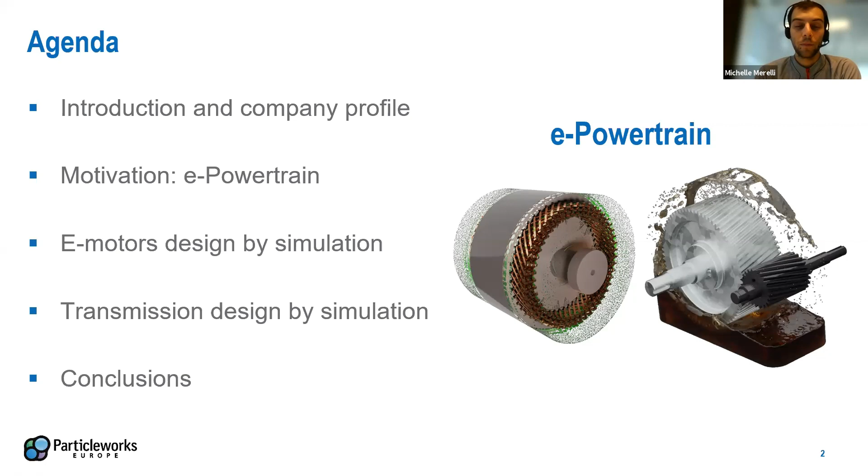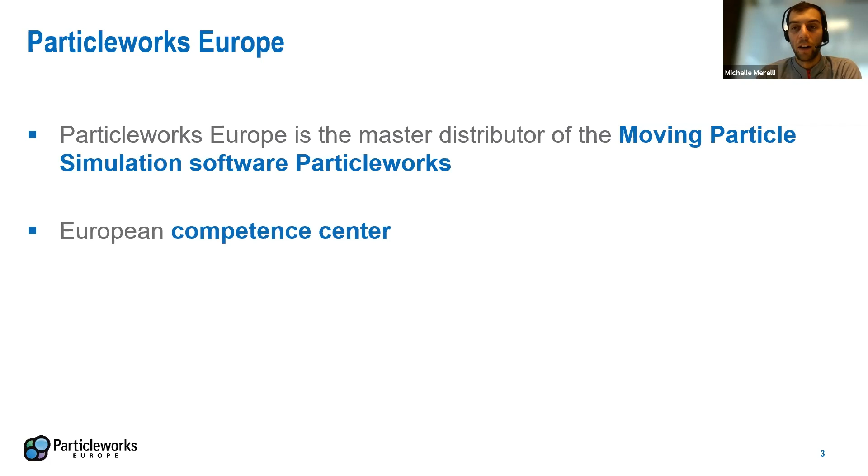ParticleWorks Europe is the master reseller and distributor of the moving particle simulation software known as ParticleWorks. This CFD method is based on the MPS methodology, moving particle simulation. It's a meshless CFD tool developed in Japan. As ParticleWorks Europe deals with distribution and support all around Europe for the use of this software, we are the competence center, and over various years of activity we have collected specific know-how on the methodology and how to apply it to industrial situations.

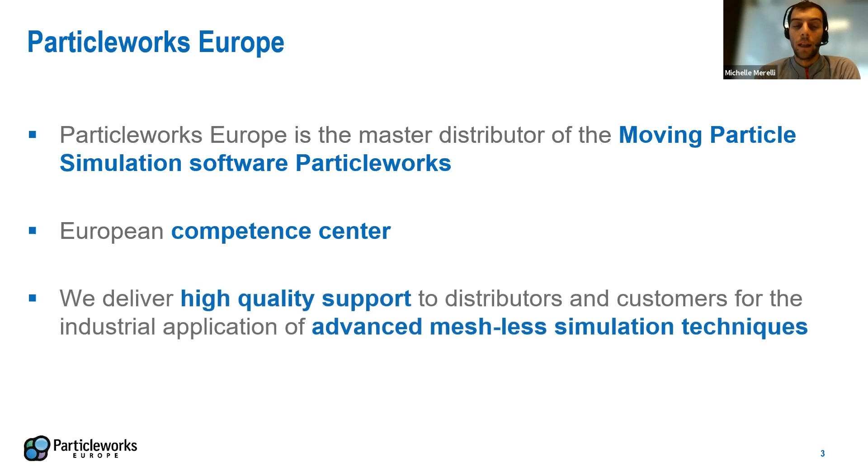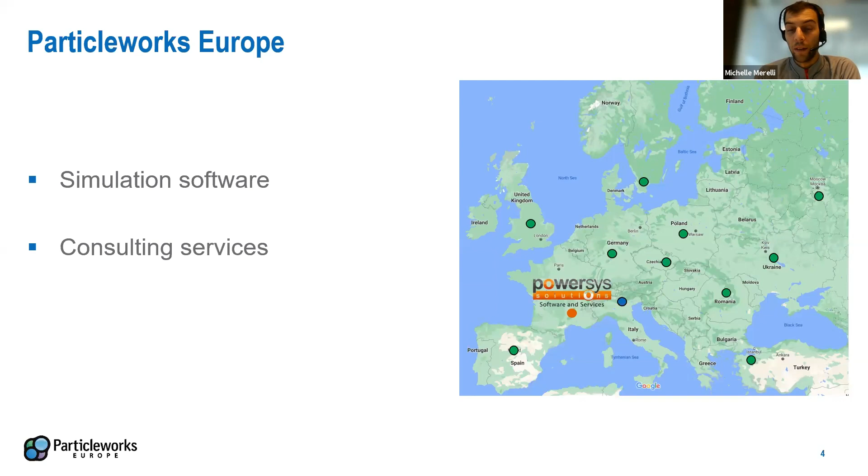We support our customers, but also our distributors, in a high quality way. There are several distributors all around Europe, and PowerSys is responsible for distributing the software in France. We are also present in Germany, UK, Eastern Europe, Turkey, and Spain. So what we offer is not just the simulation software that we will discuss, but we also provide consultancy services, training, and know-how transfer.

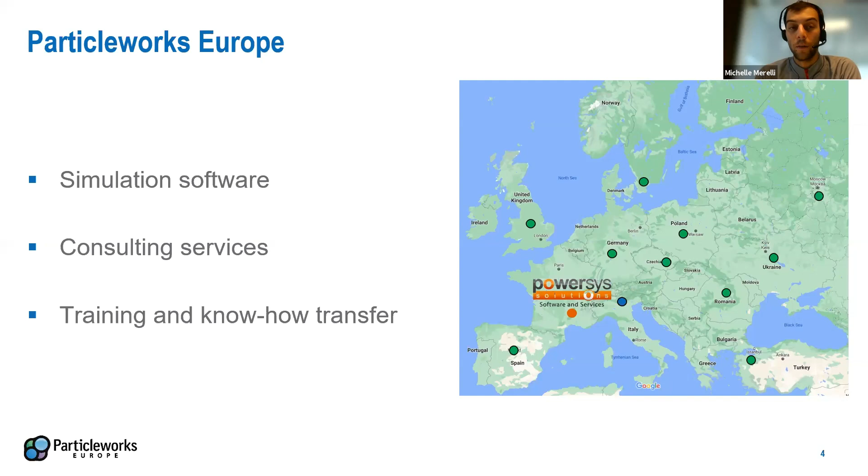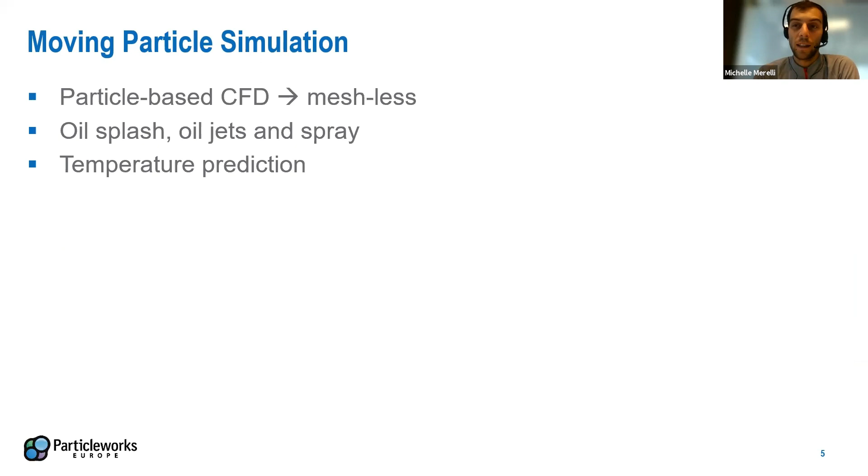Let's look at this methodology and get a clearer view of some details of the moving particle simulation methodology. As mentioned, it is a meshless approach. This means that compared to conventional methods, we don't need to prepare and clean the geometry or mesh the fluid volume before starting the simulation; we can start directly on the condition settings of our CFD simulation. The moving particle simulation approach is intrinsically a Lagrangian approach, so the computational nodes are particles representing small fluid volumes.

After that, we can run the simulation thanks to the algorithms behind ParticleWorks that are easily parallelizable. We can run the simulation on GPUs, graphic cards, and this allows for a faster simulation in general than running on CPUs.

So overall, we can see that when we have oil splashing phenomena, oil jets, or oil spraying phenomena, in all of these cases we can really reduce the simulation times by a factor of 2 to 10. So we make feasible the study of systems - we will see some examples in the coming slides - that were not previously investigated with a conventional CFD tool.

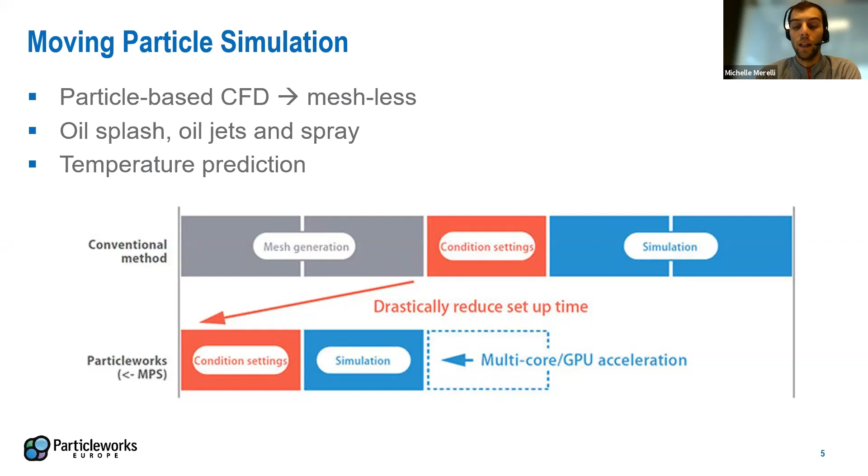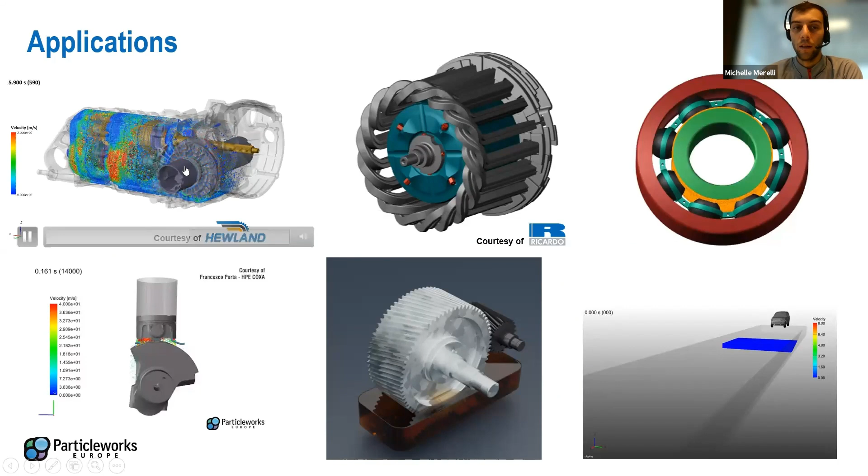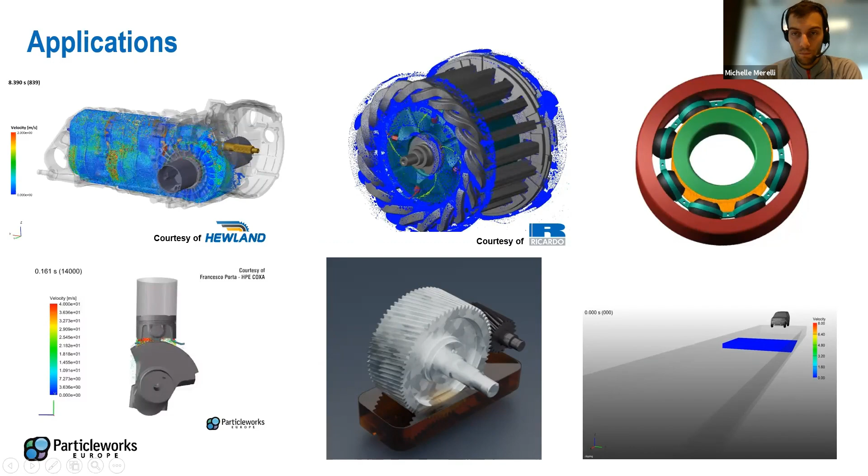Then we have e-motor cooling with the direct jets coming from the rotor, as in this case. We have bearing lubrication, also with non-Newtonian fluids. We have piston cooling with jets directly impinging on the piston.

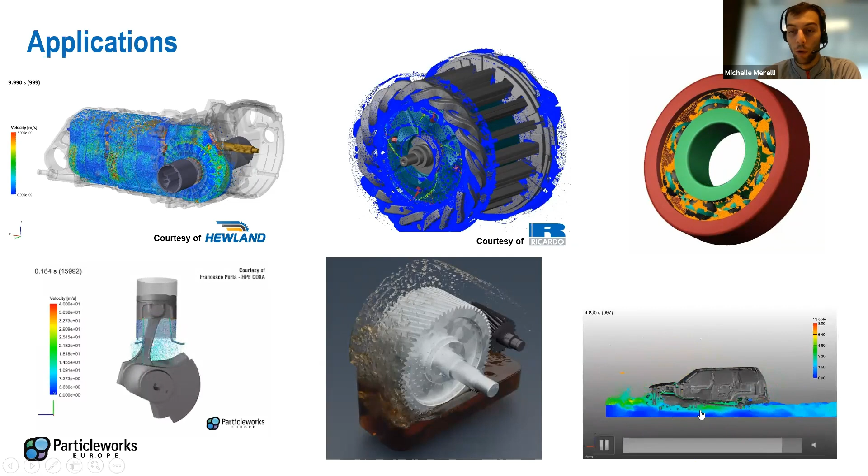Another visualization of a gearbox, lubrication or splashing. And also we have wading phenomena as well - external aerodynamics and the interaction between vehicles and water, like in this case - to investigate if we have water intakes in undesired areas.

So what are the motivations and requirements for the development of e-motors? As we know, the sales of electric vehicles are really reaching a tipping point, with very high growth. In the last 2 years we significantly increased sales of electric vehicles, especially at the end of 2020 and during this year, as reported by this graph.

So it's important, with this increasingly growing global fleet of vehicles, to provide very good e-motors for the automotive industry. At the same time, we have the roadmap report from the Advanced Propulsion Center UK that highlights the requirements in terms of costs and power densities for e-motors in the coming decade. Starting from 2.5 kilowatts per kilo in 2017, we will need a strong improvement, by a factor of approximately 3, by 2025, while the cost needs to reduce significantly.

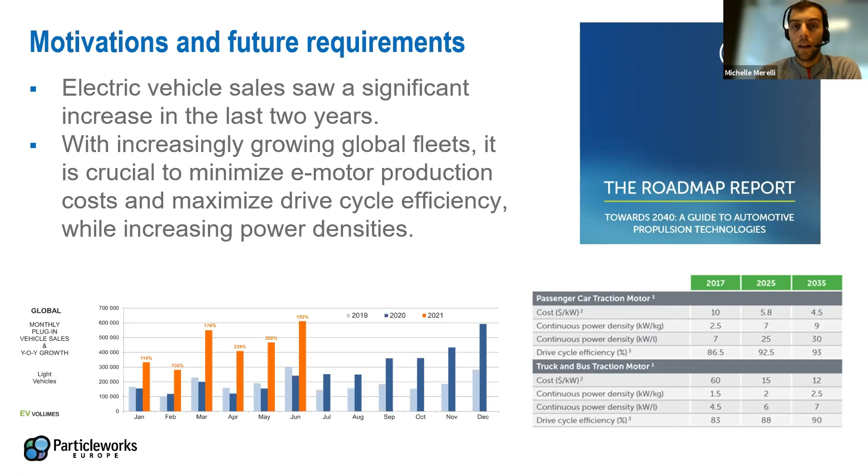So in this framework, we really need simulation to improve the design and get the e-motor design first time right.

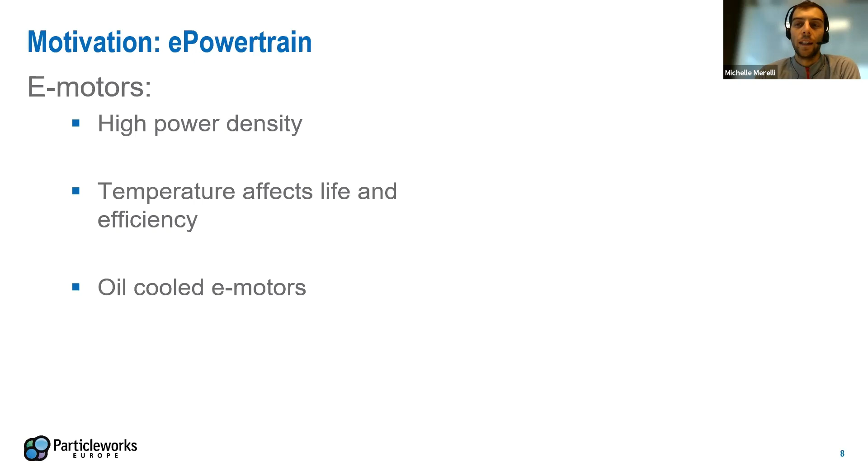As I mentioned, the power densities are increasing, and because of that, more and more we need to consider different types of cooling solutions, like the oil jet direct cooling solution. So the idea is that instead of having a water jacket around the e-motor, or instead of using air for e-motor cooling, we need direct oil jets in the most critical areas.

At the same time, we see that in the e-powertrain system we have coupled axles in which basically the oil-cooled e-motor oil is transferred. So basically between the axle and the e-motor we have transfer of oil with different solutions, and we have a closed circuit dealing with both cooling and lubrication.

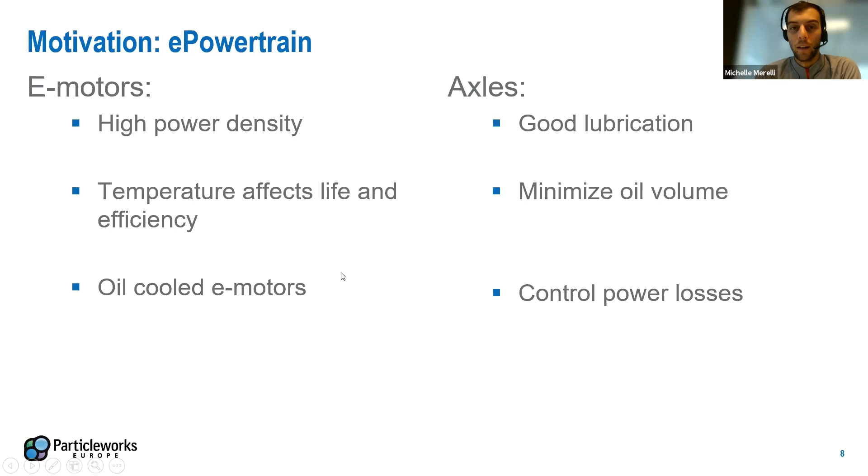So let's start with the e-motor analysis and simulation. This is overall what we can provide, in collaboration with software like JMAG. The workflow really starts from scratch, from the preliminary e-motor design, satisfying the requirements provided by the customer. First, we need to do the 3D electromagnetic analysis to extract the power losses, and also understand the electromagnetic analysis of the e-motor in general, to understand what properties we need to include.

Then we can move in parallel, and once the model is transferred to the CFD system, we can analyze the oil cooling simulation and strategies. This is where ParticleWorks enters the simulation workflow, and basically from the e-motor geometry we will simulate different aspects of that e-motor, and at the end we transfer the HTC maps for the thermal analysis done in JMAG.

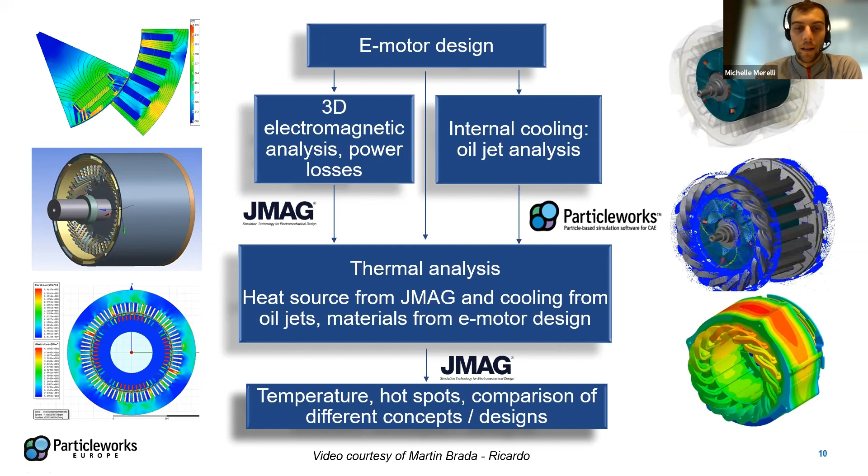So let's see what are the typical outputs, or the type of simulations we can analyze with ParticleWorks. We can optimize the flow rate distribution in the shaft - the first part is usually to balance the flow rates in the different areas of the injection circuit. In this case, for instance, a rotating circuit was introduced in the shaft and the rotor, and we needed to understand the distribution of flow for different RPM conditions.

Then what we can do is also include the air effect. Inside ParticleWorks, we can simulate air in different ways.

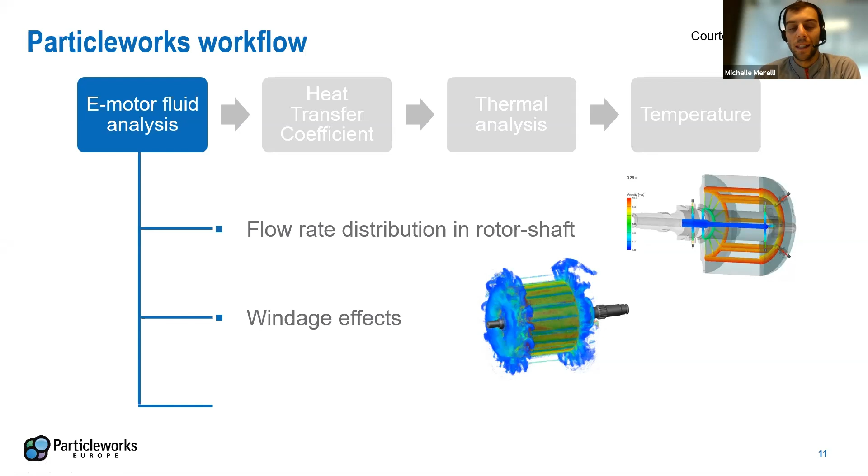One possible solution is to simulate air before simulating oil. This way, we can split the particle size, the mesh size, between the air and the fluid component. After simulating air, we transfer this information as an air field to the fluid-only, oil-only simulation, and we can extract and visualize the distribution of oil in the winding area and in the housing.

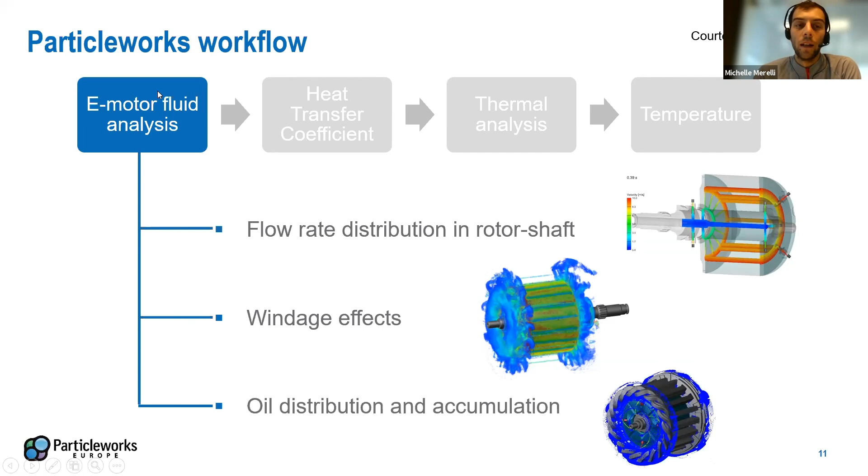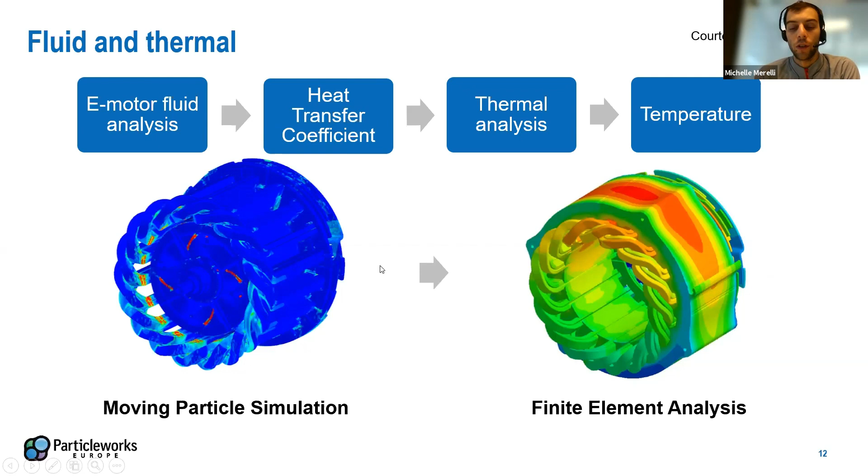After that, we map inside Particleworks the HTC on the surfaces we're interested in, for instance the windings, the stator, the rotor, and so on. We transfer these maps to an FEA solver to achieve the temperature distribution. For this step, we could transfer to an external solver like JMAG and achieve the final temperature distribution, which is the most important aspect to guarantee a long working life for our motor.

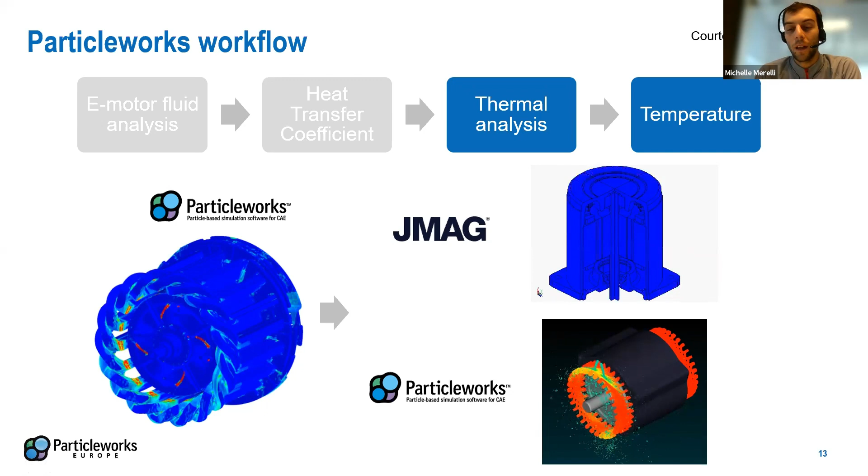But another possibility is to simulate everything, including the solid temperature distribution, inside Particleworks. This is possible, I want to mention it. It's not ideal because it doesn't offer the same degree of complexity that a specific FEA solver offers, but it's important to mention that it's doable. So you work with only one simulation and can start to see temperature distributions and have an idea of them.

So here is just a short demo of the Particleworks interface, just to give you an overview. Basically, what we have here is the control viewport for the simulation we are setting up. On the left, we have the input elements, the results, and so on—the outline of our simulation.

Inside the outline, I want to point out that the post-processing is also there, at the top. In this case, we're looking at one specific simulation. As you can see, we imported different STL elements from the CAD, separated by the kinematic laws we have to apply. We want to separate every element that has a particular kinematic law or a different boundary condition in terms of temperature. Then we have several inflows at the top, jets going directly on the windings. We can hide specific elements or activate them for the physics.

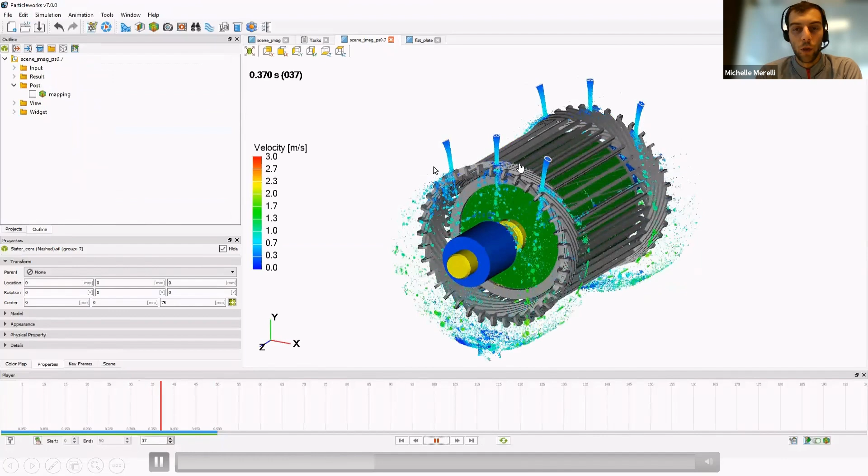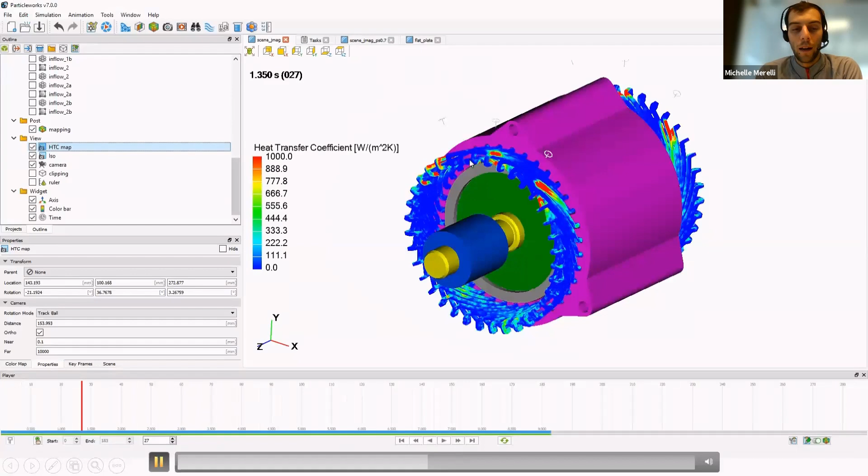In the result folder, we have the particles generated by the inflows, which we can visualize directly in Particleworks while the simulation is running, in the same viewport as the simulation setup. In the view folder, we also have the possibility to apply snapshots, saved visualizations. As you can see, I applied a visualization where I have a map already done of the HTC coefficient, heat transfer coefficient, on the windings. This map was achieved and obtained in Particleworks with that post-processing methodology.

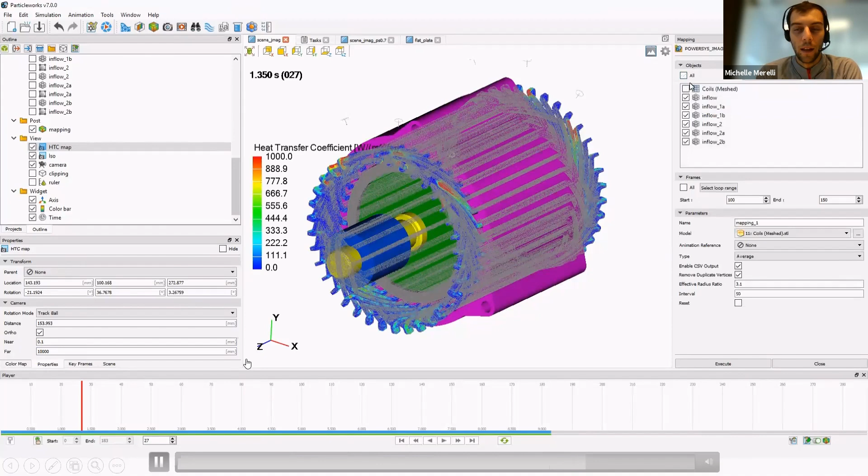So maybe discussing this in a bit more detail: the mapping procedure allows us to select a specific model, an STL—for instance, the windings in this case—and perform a projection of the fluid properties on that STL. We can average and obtain a CSV file as an output, taking in this way an average HTC on the windings for the period that was considered.

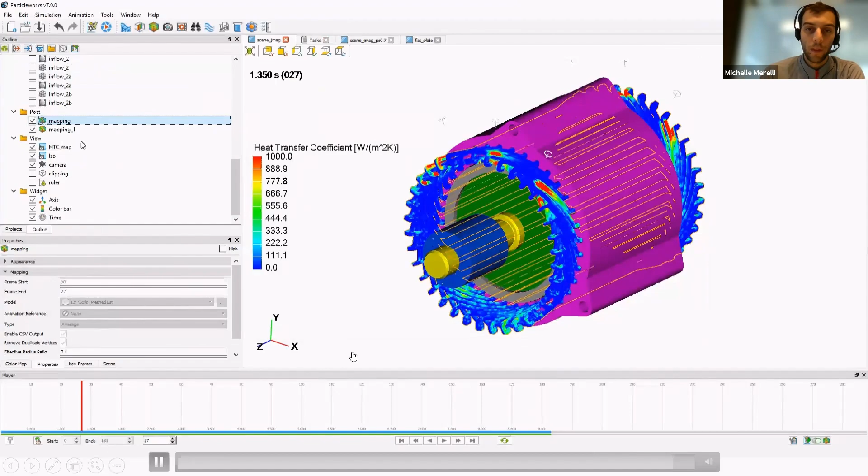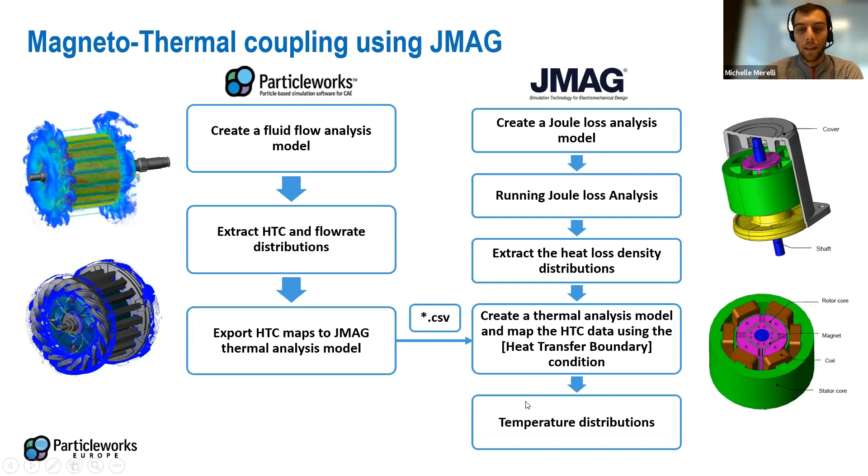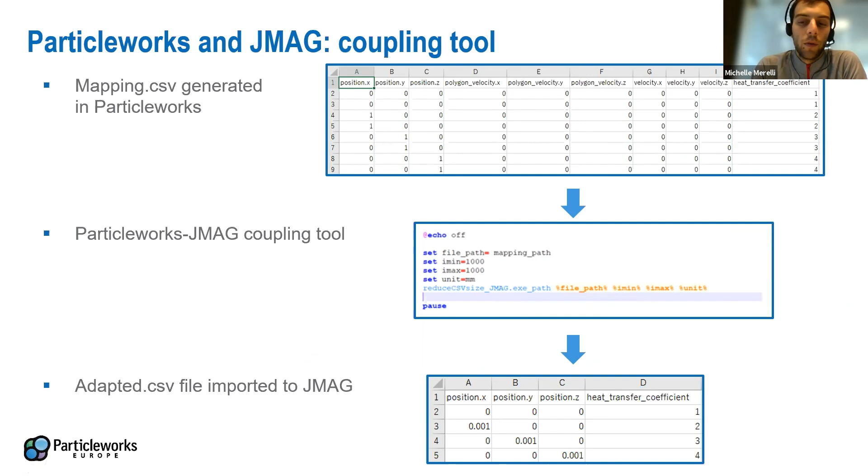So after that, we're basically at the end of this workflow, because we were able to extract the HTC for every surface. We needed to transfer the CSV file to JMAG, which was already prepared with the e-motor AC losses analysis. In this way, we can perform the thermal analysis and obtain the temperature distributions. To transfer the CSV from Particleworks to JMAG, we have a specifically designed coupling tool, shown here, which parses and selects the necessary columns in the CSV file generated from the mapping, so you can then import it in JMAG.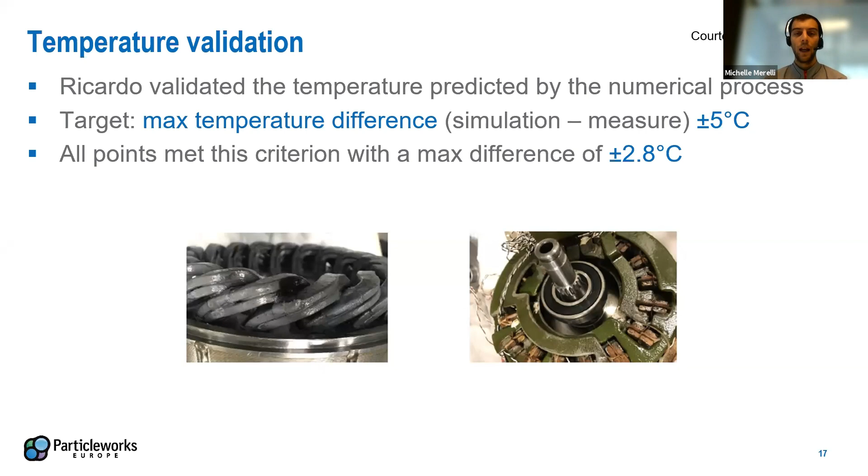What about the validation of this methodology? We did a very interesting comparison of the simulation results we were obtaining with this methodology together with Ricardo. Their objective was to measure a max difference between the simulated and experimental results of 5 degrees. What we showed for the windings area is that we are in a range between simulation and experimental results of 2.8 degrees Celsius—almost half of the maximum requirement for the applicability of the methodology required by Ricardo.

After this validation, we also worked with other customers and further validated the methodology. Right now we are very confident with the solution and with the settings. It's increasingly interesting to see results and approaches in this field.

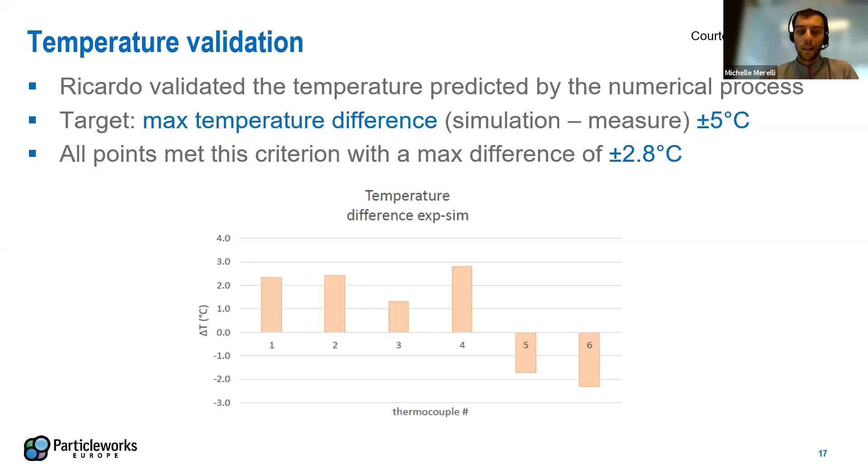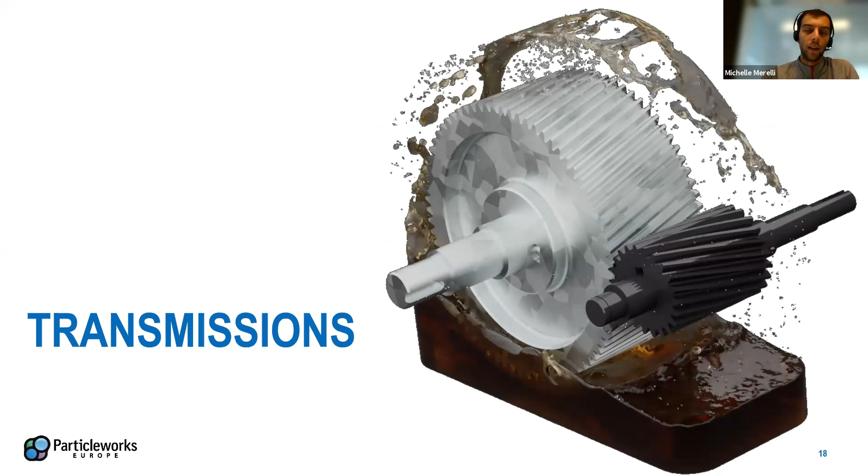Moving on to the transmission side, as I mentioned, the e-drive is also usually coupled with the e-motor. Let's have a clearer view of what observations we can extract, what output we can expect from ParticleWorks in simulating transmissions. This is actually the first field of application of the software, so we have even greater experience in this regard, and more and more customers using it for this kind of approach. Coupling the two is very suitable and interesting.

What our customers usually do is analyze the lubrication methodology in this kind of system, comparing oil splashing with forced lubrication. We usually see the methodology applied for different RPM or oil level, different geometries, or also to analyze how integration of a new geometrical element can impact and influence the flow distribution and the lubrication levels.

Another aspect that is investigated is extreme conditions, so hill starts or panic stops, or situations where we have big acceleration applied to the system that can change the oil distribution quite significantly.

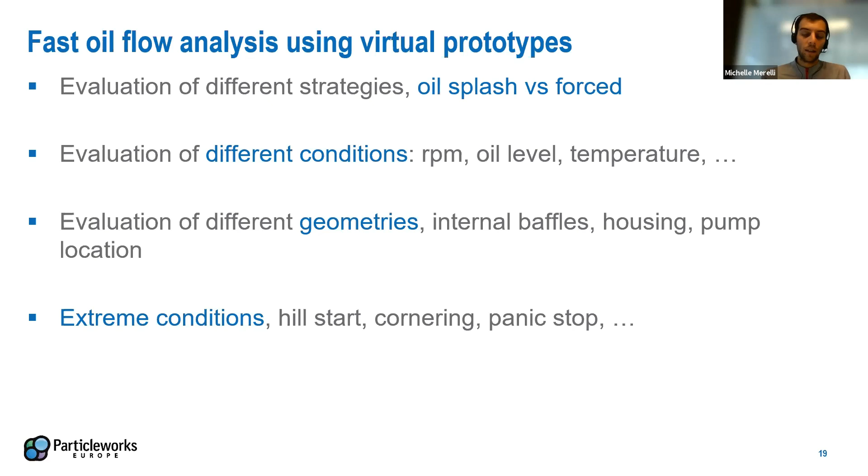One of the first applications or validations in this regard was done with Comer Industries, a company that develops coupling gearboxes together with other things like axles and so on. In this case, the focus was on the coupling gearbox between an electric motor and the axle. This is the system that we will discuss in detail.

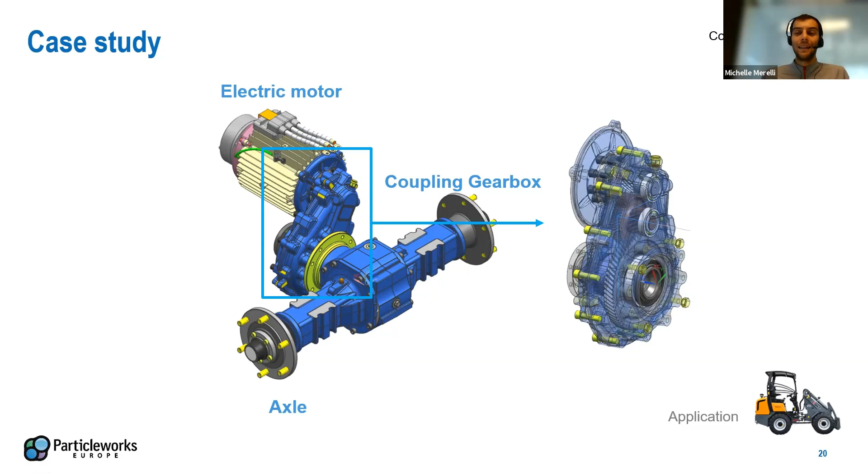The requirement was to simulate and provide a virtual prototype of this system that was able to provide answers in terms of design within 1 week. Previously, CFD tools could not guarantee results in 1 week—the previous methodology with a lot of work required at least 1 month. But with this methodology, we were able to simulate several conditions in less than 1 week.

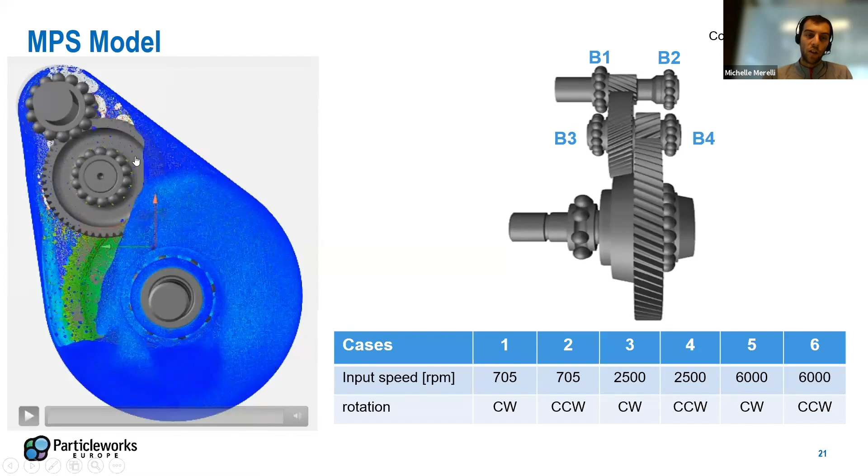In this way, we could compare different loads and also rotating directions. We could compare the lubrication levels for bearings, including the bearings on top, especially because they were the most critical. And we could compare those lubrication levels with a real-life prototype.

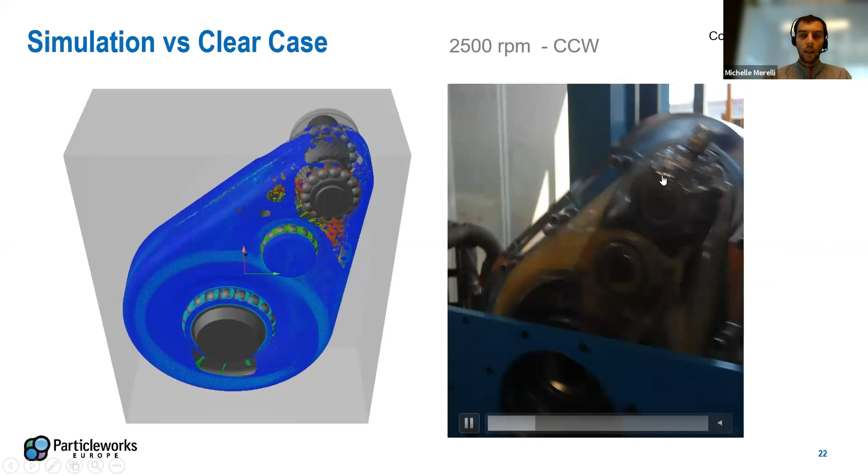As you can see here, we are looking at the same conditions simulated and measured experimentally. We can see clearly the oil film created on the central bearing. We can see that there is much less oil on top, and here a clearer view of the film that can form there.

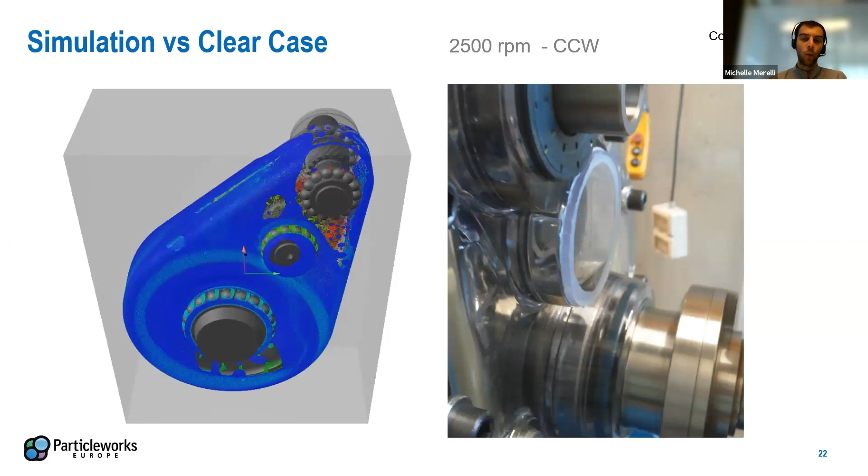The advantages of using simulation instead of a clear casing are: first, you can create a virtual prototype at significantly lower cost. You can get information you don't have access to with the clear case, because you cannot inspect internally, for instance, and you cannot easily extract very accurate oil measurements. So the idea is that with this methodology, we can provide fast design solutions to improve the design without having to create the prototype and test it.

In more detail, what was done here was for every load case to compare the lubrication level as observed by the simulation and also the clear case. We could see that there was a good correlation of the bearings' lubrication levels. As shown here, we had 4 degrees of lubrication assigned to the different bearings, B1, B2, B3, and B4, and we could see very strong correlations between the simulation and experimental results.

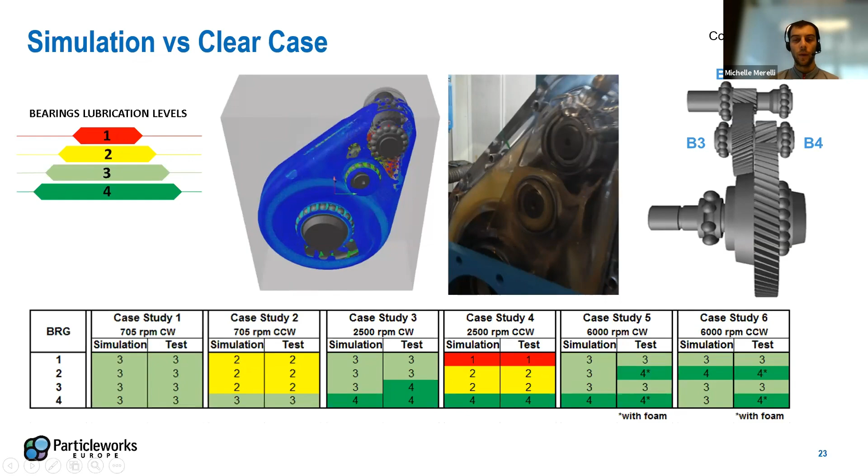We don't only have oil bath lubrication systems, but we can also analyze direct jets on the gears for more critical applications. In this case, for instance, we can analyze the oil distribution on the teeth of the gear. We can reduce the temperature of the gear, and in general we want to run with less oil amount so that we reduce the churning losses.

In the analysis of direct lubrication, we can also map and understand what is the covered area, and we can vary the jet properties accordingly.

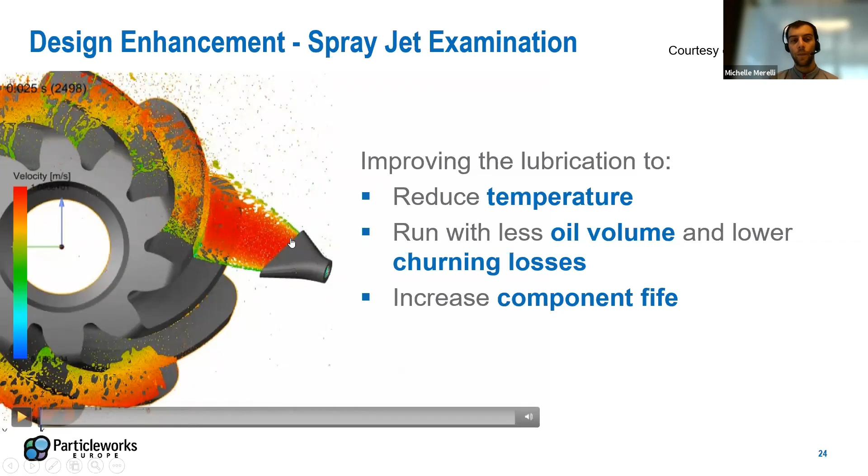Another aspect I mentioned is oil pump scavenge analysis. In a lot of systems, we have a circuit that redirects oil from the sump, or from the filling oil, to the injection areas. But of course, we have to guarantee that the pump is always able to extract oil from the baffle at the bottom.

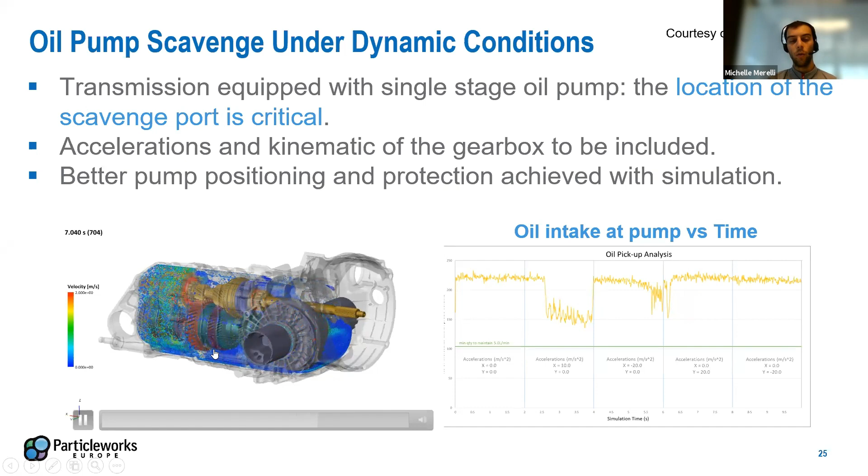What we see here, we can clearly see the effect of accelerations on the oil distribution, and on the right, we can monitor for different accelerations what is the effect on the flow rate at the pump. In this way, we can study our system and understand if we can provide lubrication for every acceleration. We could also think about covers or ways to always allow the pump to work efficiently.

It's important to mention that ParticleWorks is now completely integrated with Romax technology. Some of you might be familiar with this software, which is a gear box and gear designer tool.

So what we can actually do inside Romax now is directly transfer and implement a CFD simulation from the same CAD model. It's very easy to transfer this kind of model that is used for gear design and stress analysis.

It's very easy to transfer this geometry to a simulation that gives us information about churning losses, lubrication levels, and cooling efficiency. So we can really speed up the design process, not only considering deformations or stresses on the gears, but also the effect of these choices on churning losses and lubrication analysis.

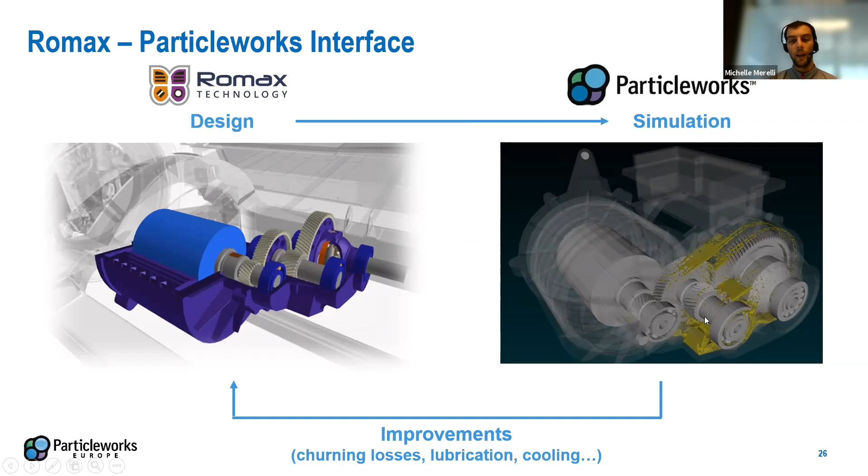So in general, what we want to do, in this case and also in the e-motor case, is to have a virtual prototype that is right the first time, at the first design. The coupling with Romax further expands our capability to speed up the simulation process and integrate it into the design phase.

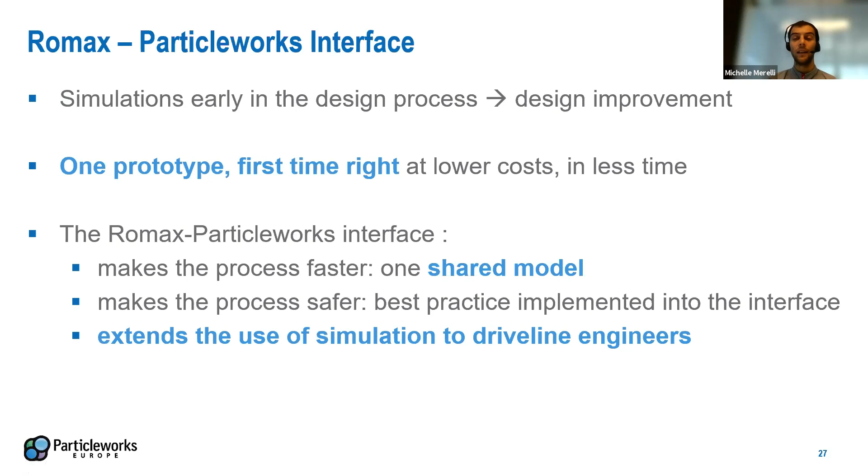What we were able to conclude from these experiences and feedback from our customers is that the use of simulation and CFD, thanks to ParticleWorks, is very well integrated into the R&D workflow. It's able to provide results in significantly less time than we used in the past, and provide information about improvements to the cooling system and lubrication of this kind of system. This way, we can reduce the time to develop, reduce risks and costs, while providing additional know-how and increasing performance.

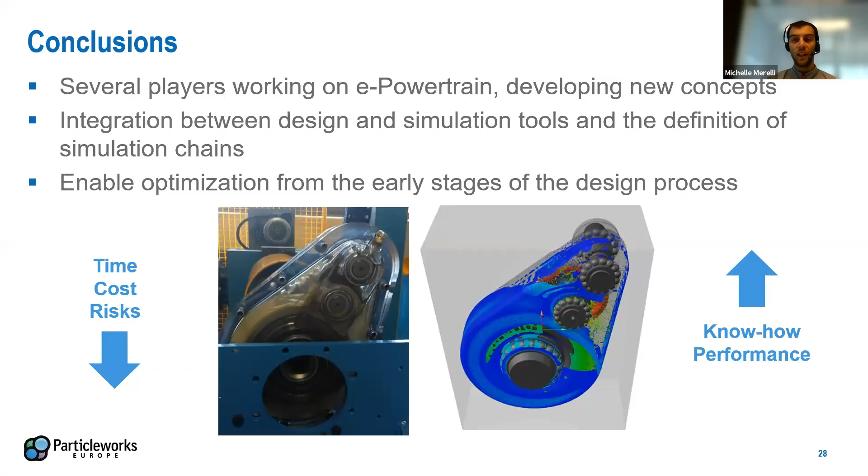So for now, I think I'm finished with the presentation, and I'm available for more questions if you'd like me to answer them.

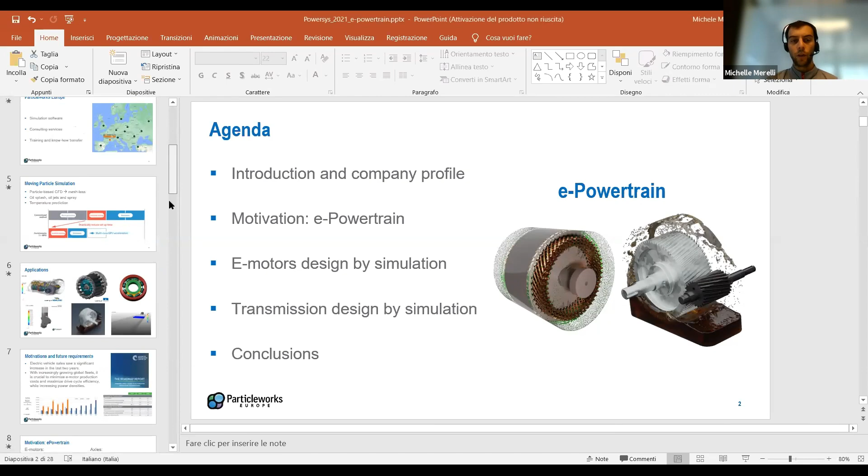Yeah, of course. In the improvements of the e-motor and system cooling, we have different strategies. One is to understand the flow distribution between the different nozzles. Another aspect, not included in this model, is that we could have flanges or additional geometrical elements that control the position of the jet at the exit. So if you think about having a nozzle here, or redistributing the oil with a significantly longer channel, we could really optimize the impinging area and the spraying of oil on the winding. That's an advanced topic we can take a look at, but yes, for sure that's possible and that's done.

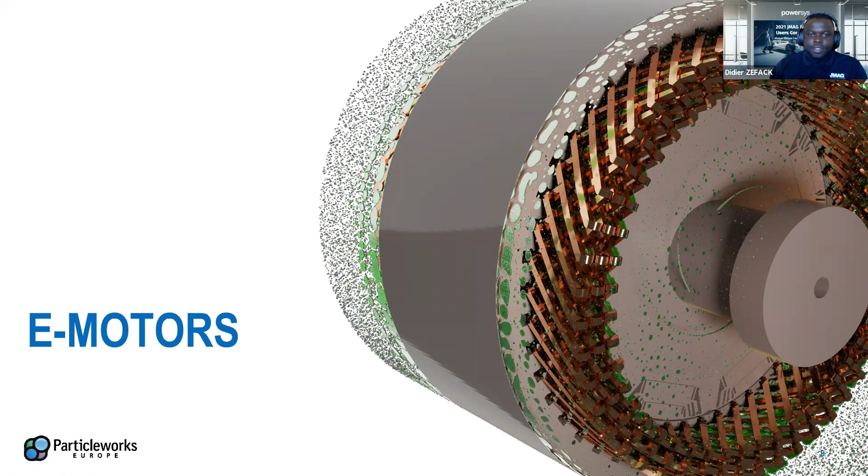Thank you. So the next question is, how long does it take to run an electric motor simulation? Yeah, that's a good question, actually.

It depends on quite a few factors, like the amount of oil we need to simulate that accumulates inside the e-motor, the flow rates, the RPM, because the simulation time step is also connected with that. But in general, also the hardware matters, Particleworks allows for multi-GPU computation, so depending on the hardware strategy you use, you could have a reduction of 2 to 5 times. But in general, let's say we are in a range of about 1 week for the entire simulation process, though there are several factors that could make it faster or make it longer, up to 2 weeks max.

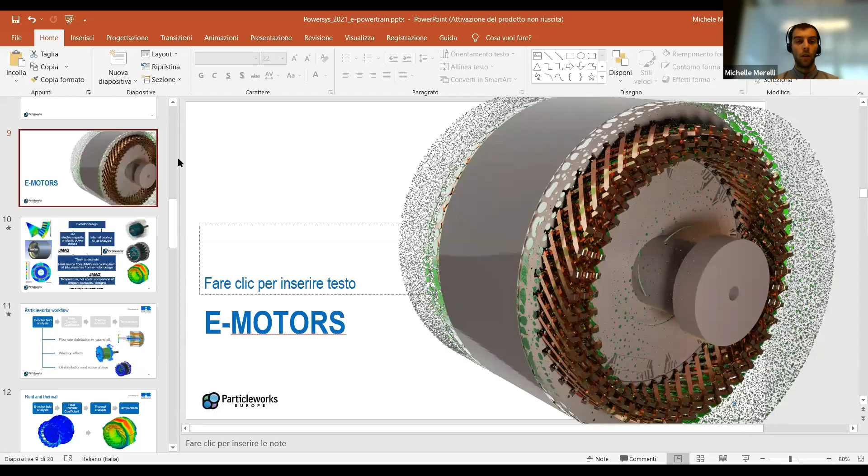The last question that I have: how much does the Particleworks software cost? Yeah, regarding licensing, I don't have pricing to share here, but if you want additional information, I'd suggest contacting us so we can give you information about licensing, because it really depends on your request, how many users you want, whether you want a longer or shorter license, and so on. So please contact us. Let's say the order of magnitude is similar to other CFD solvers.